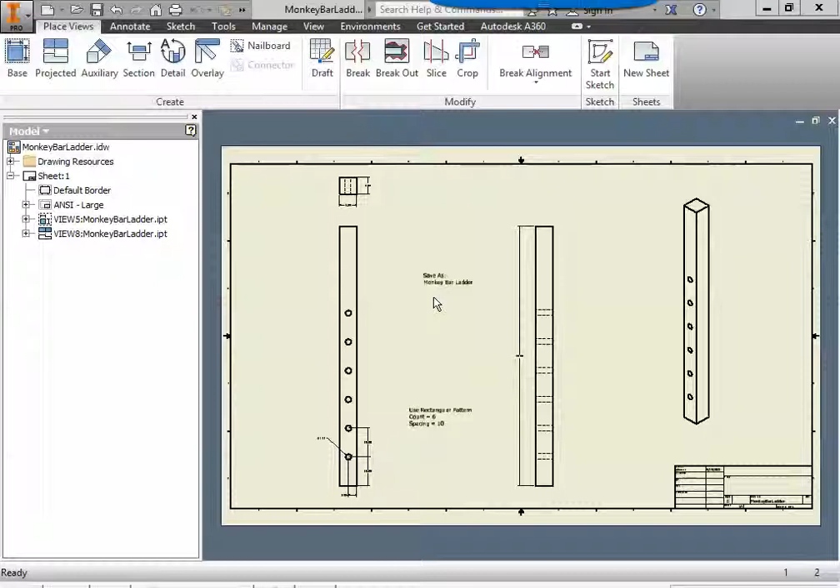In this episode, we're going to be looking at how to create the monkey bar ladder. Our monkey bar ladder is going to be 90 inches long, or 90 inches high, we'll say, 6 inches wide, and 6 inches deep.

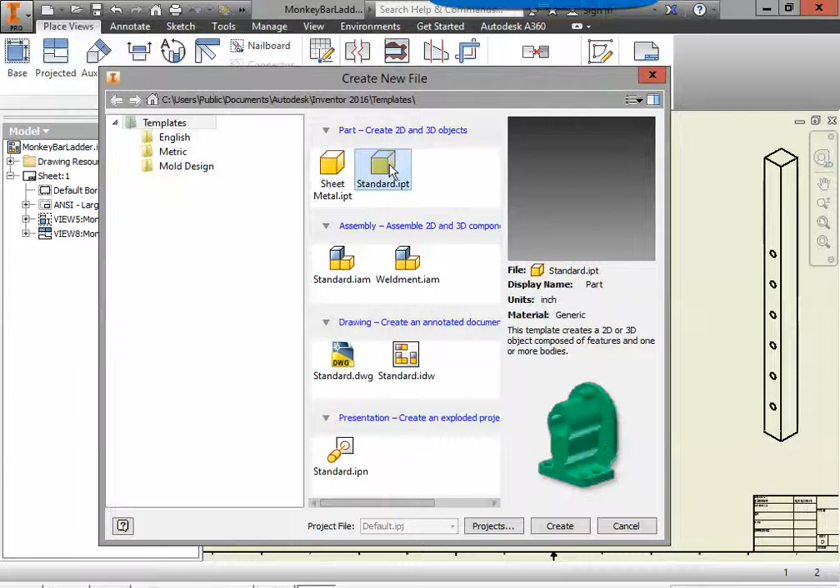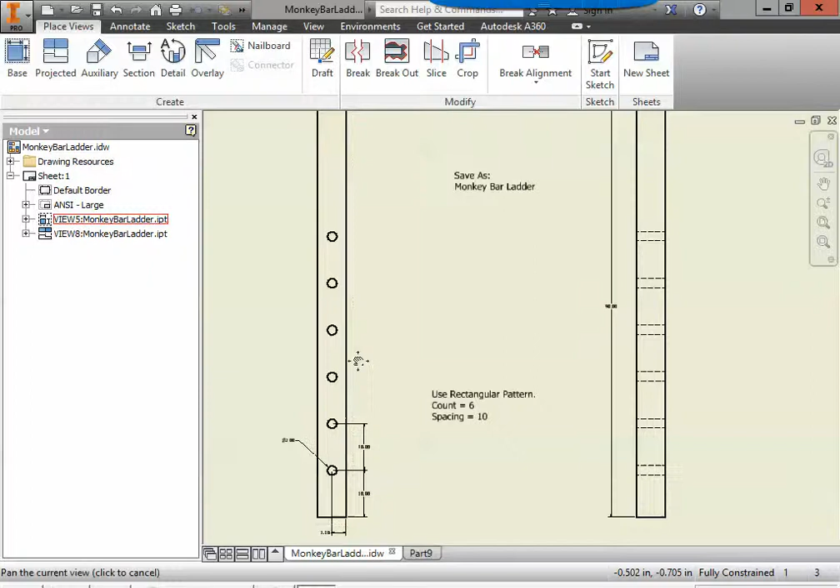So the first step is go to the Inventor I and create a new standard IPT. We're going to start a 2D sketch on the XY plane, and now we're going to draw a rectangle. The rectangle we're going to draw is this one right here on the front. So we're going to draw a rectangle that is going to be 6 inches wide and 90 inches tall.

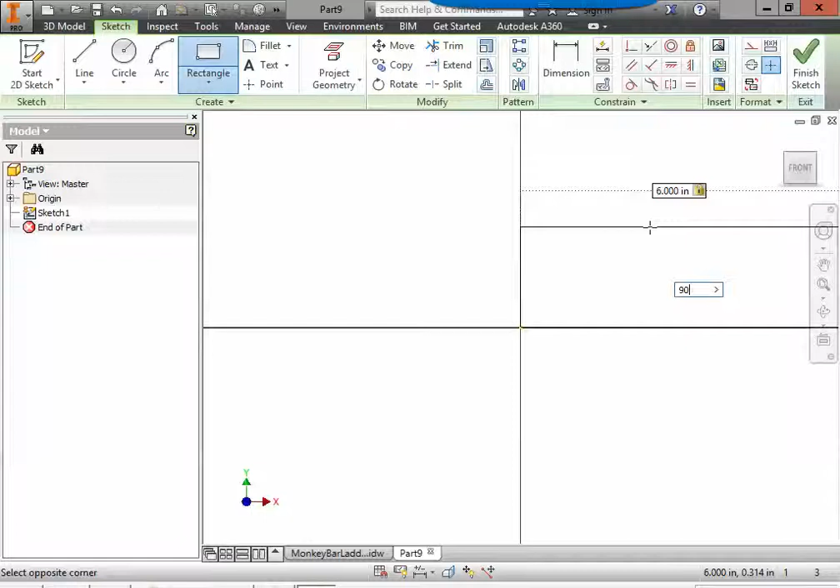So let's grab the 2-point rectangle, start at the center, the origin. We're going to tell it the width should be 6 inches. We'll hit the tab key. The height should be 90 inches. And I'll zoom all. Looks good. Let's finish our sketch.

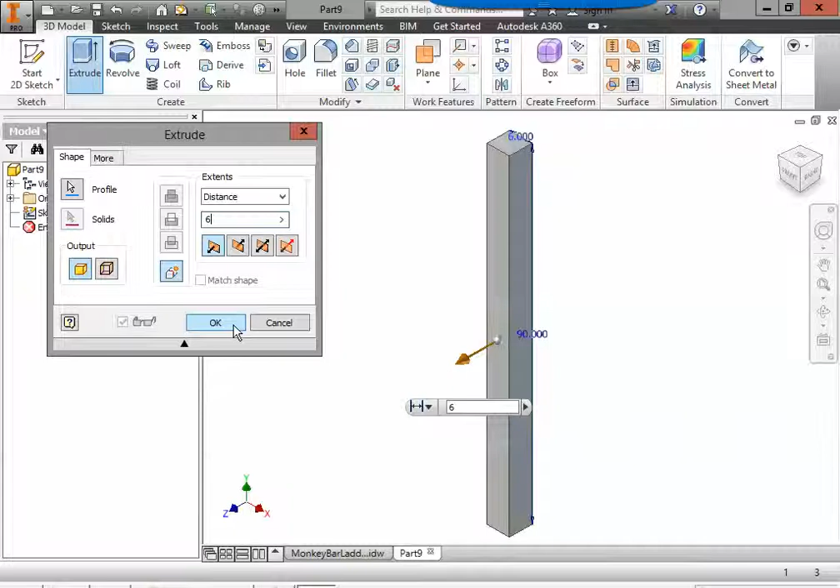Let's extrude. Why don't I back out and make it a little easier to see. Let's extrude that rectangle 6 inches. I'm getting that right off of here, so it's 6 inches wide and 6 inches deep.

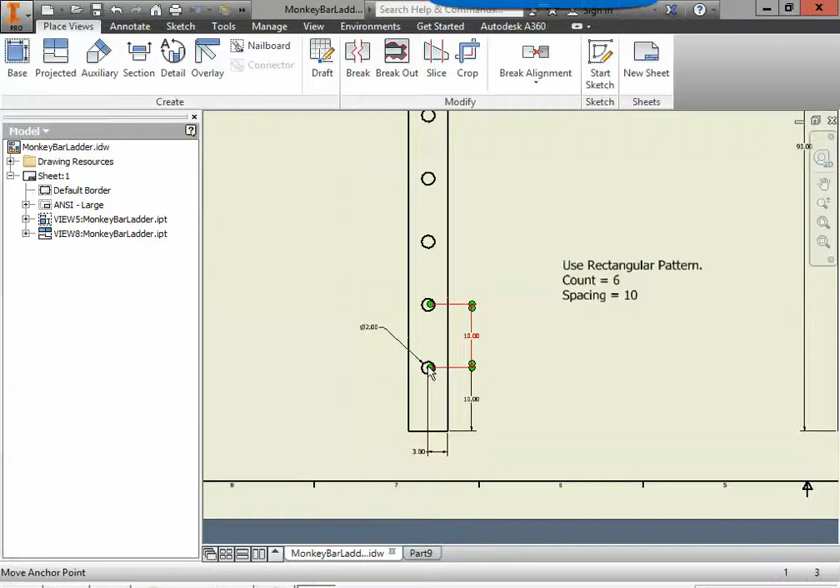Looks good so far. Next up, we need to add the holes on there. The holes can be done a number of different ways. We're actually going to be putting a single point on there, and then we're going to rectangular pattern that point. After we do that, we're going to be using the hole tool to cut out these holes. So the point that we need is going to be placed right at the center of this hole, and it's going to be 3 inches from the side and 10 inches from the end.

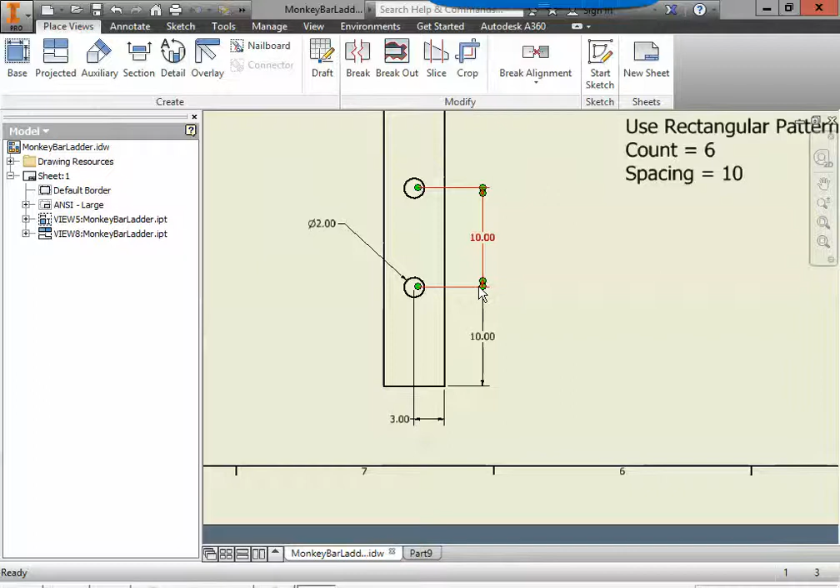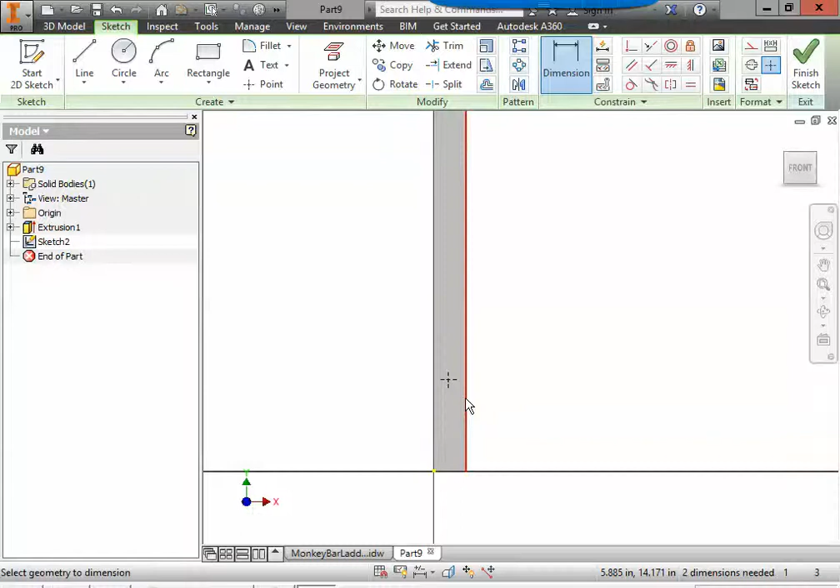Okay, let's go back to our part. We're going to create a 2D sketch on the front, so I'm going to select the front right here. We're going to place a point somewhere on our part, and then we're going to put some dimensions on there. So the first dimension is from the side of our piece to the center of that dot. We'll place the dimension and tell it to be 3, enter. The next dimension is going to be from the bottom of our part to that center point, and that needs to be 10 inches.

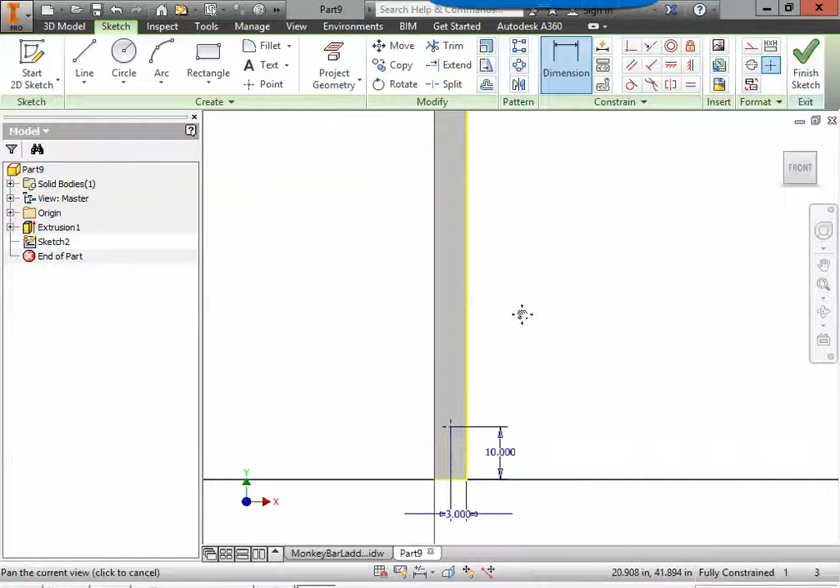Now we're going to use a rectangular pattern. If we look on here, there are 1, 2, 3, 4, 5, 6 holes. So our rectangular pattern is going to have a count of 6. And they are equally spaced 10 inches apart. So our spacing is going to be 10. So when we come back here, we're going to come to the pattern area. There's rectangular pattern, circular pattern, and mirror. We're going to use the rectangular pattern.

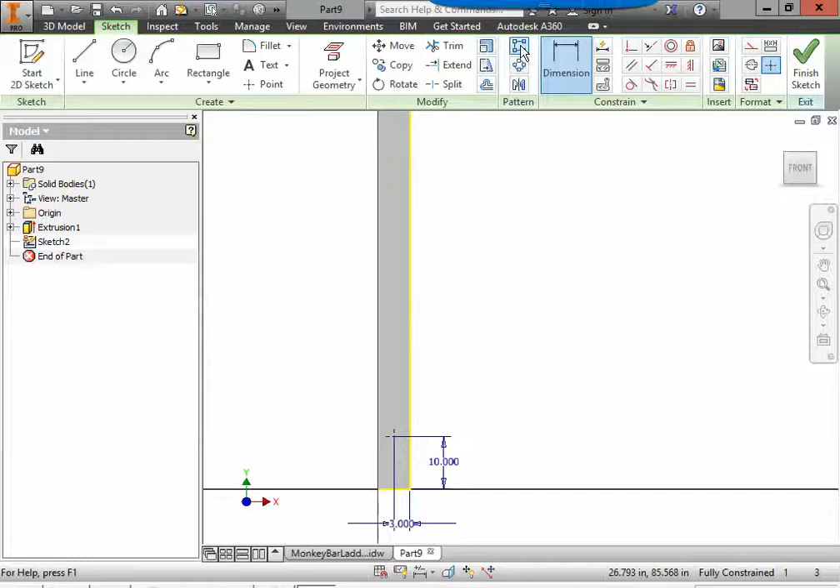Step 1 is to tell it what geometry would you like to pattern. And in this case, it's a dot, or that point. So we'll click on that once it's red. The second step, it needs to know which way you'd like to pattern. Do you want to pattern left to right or up and down? We want to go up and down, so we're going to select the direction arrow and select an up and down line. Lucky for us, it's already patterning up. If it was going down, we could grab the flip tool and flip it down, up, down, up. So let's leave it pointing up.

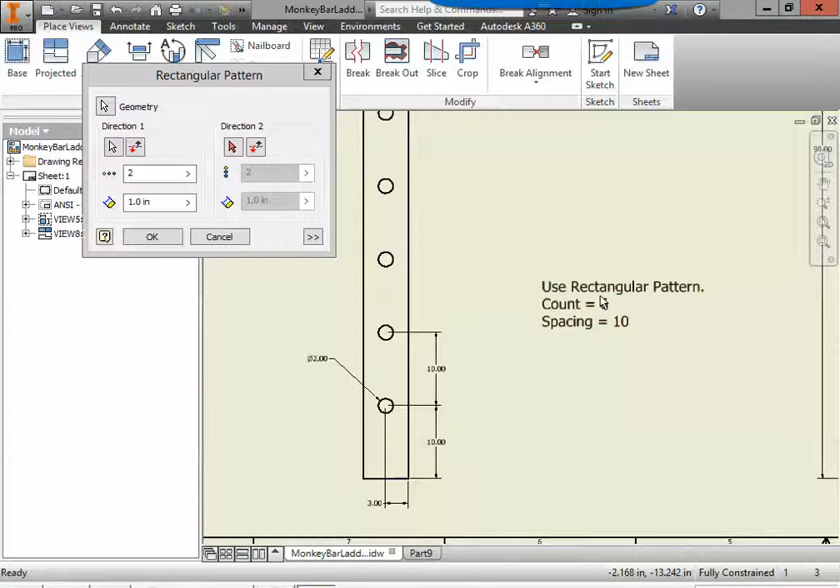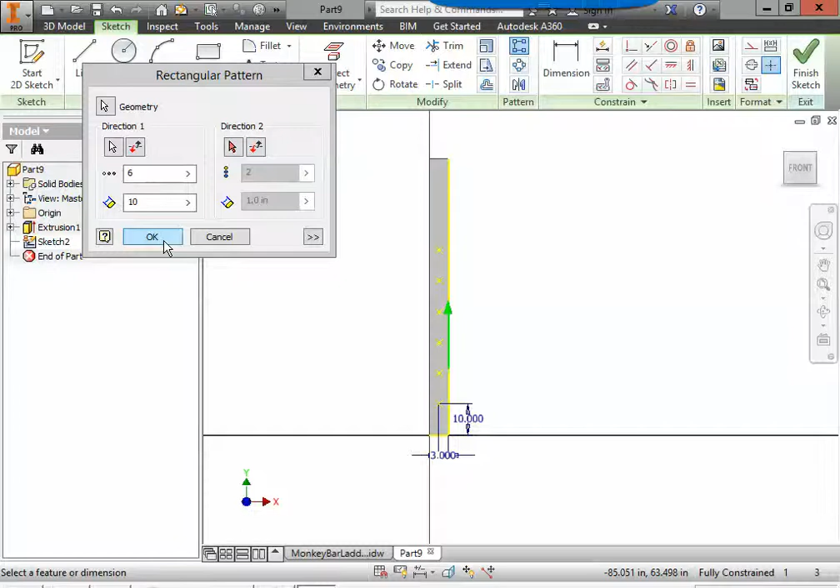And what did we say our count and spacing were going to be? 6 for a count, 10 for a spacing. So let's put in 6 for our count and 10 for our spacing. And that looks good because the monkey bar ladder doesn't have holes going all the way to the end. So once we have that, we can click OK and finish our sketch.

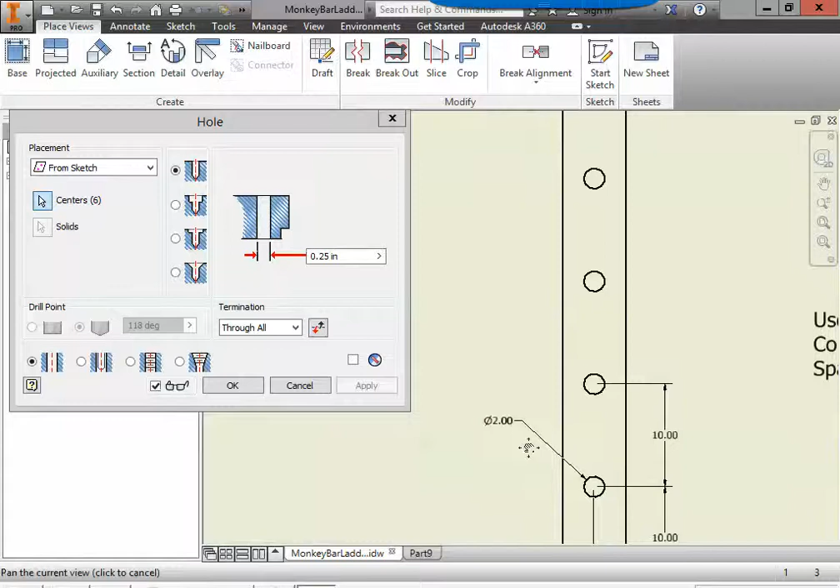And now we can use a very helpful tool called the hole tool. Thankfully, the hole tool will grab all of those points for us. Right now it is set with a diameter of 0.25 inches and it's set to cut through all. Well, we do want it to cut through all, so we'll leave that. But over here, we notice that the diameter of these circles are going to be 2 inches. So we're actually going to have to change the diameter from 0.25 to 2. So we've got the right diameter, we have it cutting through all of the part. We can hit OK. And there you go. We have the monkey bar ladder with our 6 holes 10 inches apart, cut through all.

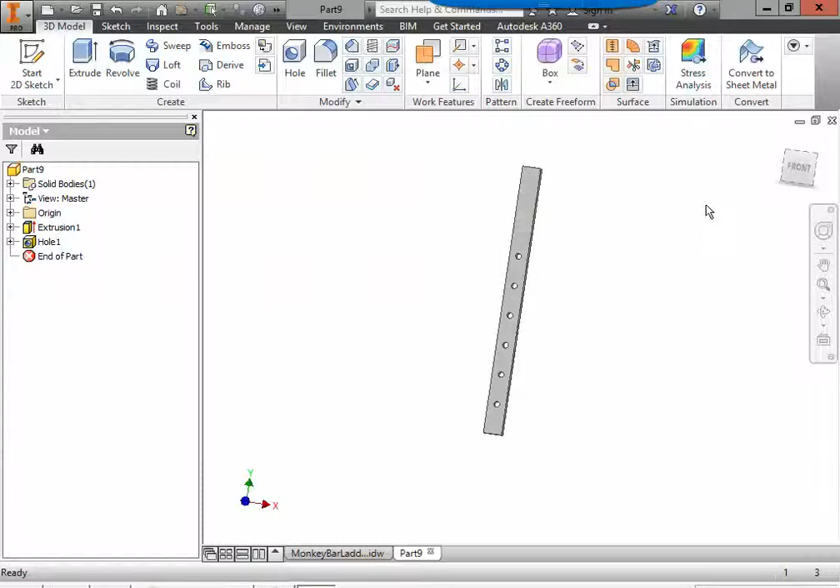Lastly, we're going to have to save this. So let's go to the Inventor I, select Save As. You're going to want to select your H drive. I have a folder that I'm going to put it in. And we have to give it a good name. So let's call this Monkey Bar Ladder.